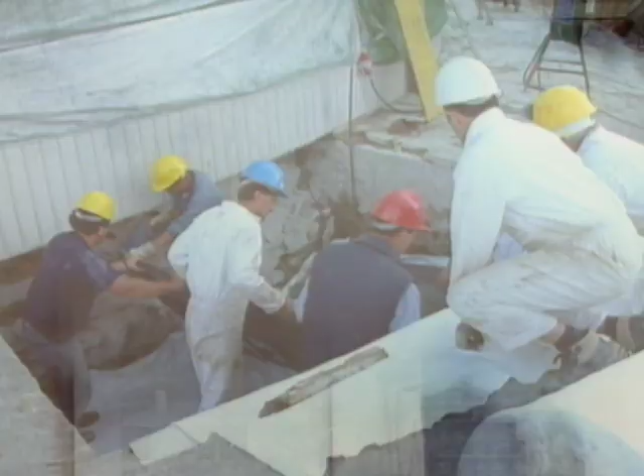In 1995, Pisa's famous tower was falling over at the rate of about 1 millimeter a year. That September, an operation to halt this gradual topple reached a critical phase. One of those in charge of the engineering was Giorgio Macchi.

We have always been very nervous when we did any intervention on this tower, because the tower is reacting in a way which is not always the way we expect.

Operations continued round the clock, and throughout the first 36 hours went smoothly. But the patient remained under close observation.

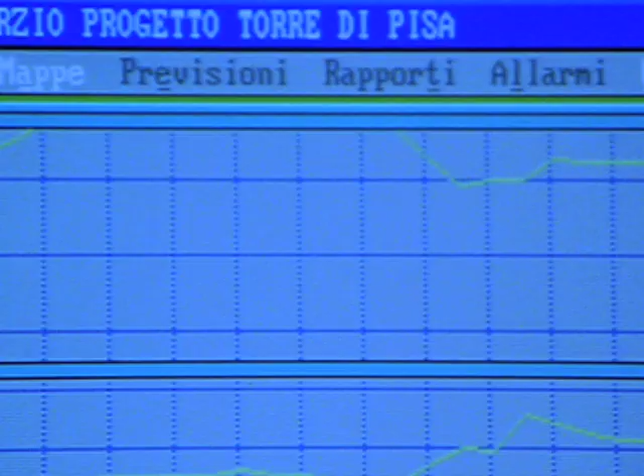At 3:30 a.m. on September the 6th, the tower began to move. The next 9 hours, it fell as far as it had fallen in the previous 12 months.

The engineers were woken in their beds. Panic is not the word to use. Worried, yes. Concerned. And my concern was to get out here as quickly as possible and help in the decision-taking as to how we were going to stop the work, re-stabilize the tower.

The lurch was halted and an immediate collapse prevented. But what became known as Black September taught the engineers how even the best of modern science and technology will struggle to save this medieval enigma.

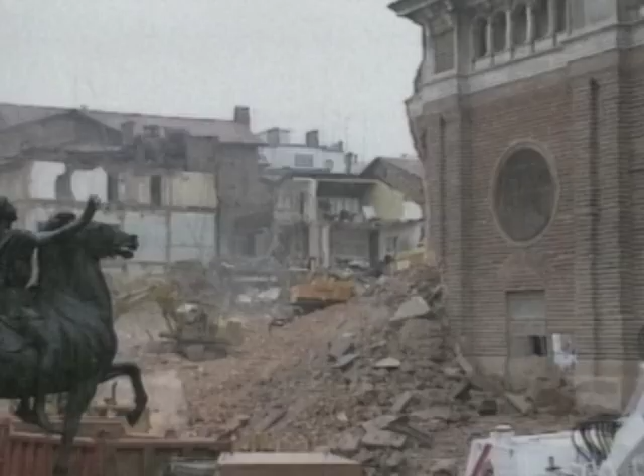Towers do collapse. In 1989, in Pavia, a few hundred miles north of Pisa, a 14th century bell tower collapsed, killing 4 bystanders.

Pavia's tower wasn't even leaning. That's why the quest to rescue Pisa's tower was launched. A committee of brilliant minds has been assembled, and saving Pisa is now among the great prizes in civil engineering.

Among those rising to the challenge is John Burland of Imperial College London. When you come in through the west gate and see this glistening white structure looming over the cathedral, with its lovely symmetry, it is beautiful, but it's breathtaking. The fact that it hasn't fallen over, that it's just shimmering on the edge.

Burland, a soil engineer, digs into problems below the ground.

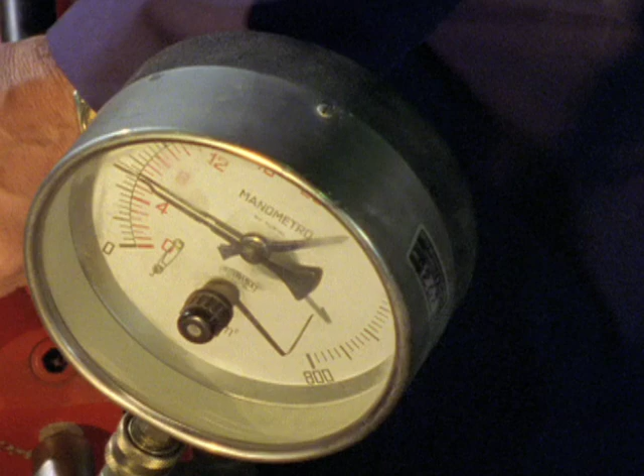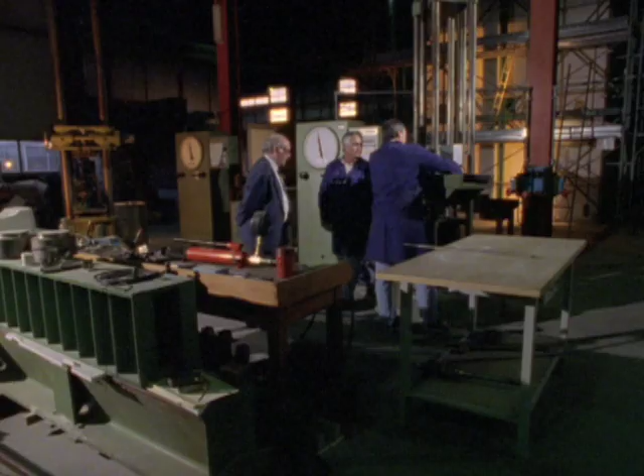But the committee contains equally determined experts who focus elsewhere, like Giorgio Macchi of Pavia University, a structural engineer. Macchi investigates weaknesses in the tower's masonry. My work is on structural problems, so I saw immediately the structural risks. In my opinion, the tower is in real danger.

In 1990, Pisa's dangerous tower is closed to tourists. It's announced the closure may last just 3 months. There's little time for delay, and late 20th century engineering should make short work of this medieval relic.

But the committee is soon bogged down in arguments which continue through many meetings over several years. Conflicting analyses of the tower become the subjects of furious debates, as there is rarely hard evidence that one is any more accurate than another.

The tower turns out to be an engineering puzzle that cannot be unraveled in the way the committee members are familiar with. Meanwhile, the lean continues to grow.

The first to silence debate are the structural engineers. There is a series of massive flaws in the tower which break every rule Giorgio Macchi knows. In spite of our knowledge of structures we have as designers of bridges or other structures, I found here special problems. The shape of the tower is not the usual shape, and every engineering judgment was wrong in this case.

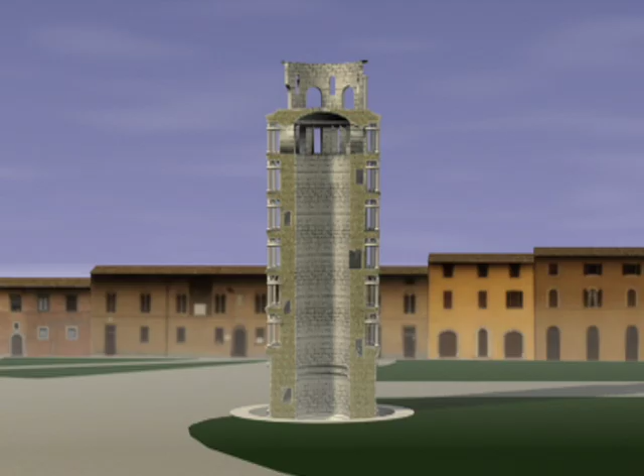The tower is a hollow cylinder, 12 meters wide. In most places, the walls are almost 3 meters thick. But corkscrewing through the walls is a staircase wide enough for 2 Pisans to climb side by side, an extravagant design, which means that in some places, the walls are under 1 meter thick.

This would be just adequate if the walls were solid marble. But this marble facing is only 25 centimeters thick, and behind it there is a conglomerate of stones and lime, which has a very, very low resistance.

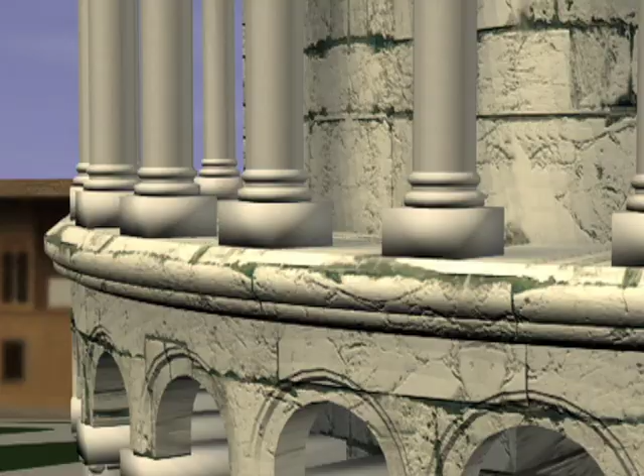The infill of stones and lime is not consistent. There are several large holes in this conglomerate, created by the medieval builder's wooden scaffold. The holes are some 40 centimeters high, so they reduce the resistance area of the wall considerably. The marble is more than a facade.

It provides most of the support for the 14,000-ton tower and bears the stress created by the lean. That's why many of these bricks are breaking up. Although some of these cracks are superficial, one may be the start of total collapse. Macchi must find out if the tower has a flash point.

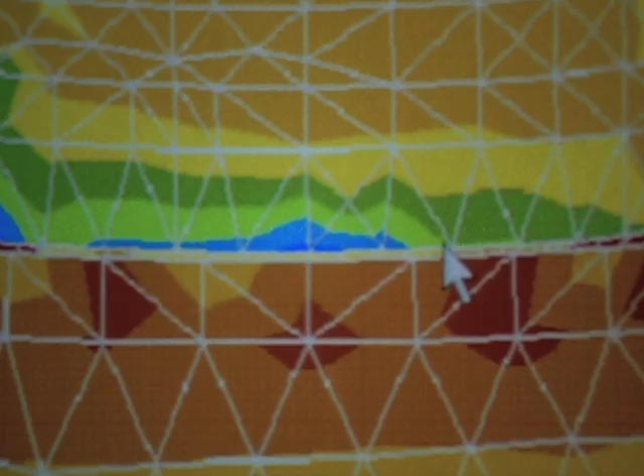Researchers create a computer model which detects the tower's excessive structural stress and then highlights it in red. There is marble under immense pressure right below the lean on the south side of the second story at floor level, where a doorway meets the staircase.

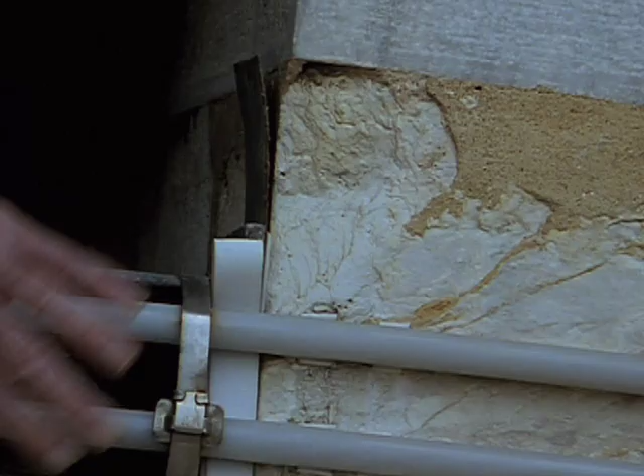The tower is about to burst right here. By calculation, we found that this is the really critical point. And this is shown by the fact that there were very many substitutions of stones in this area. You can see here is the original stone. These are completely substituted stones here and there, and completely substituted in this area.

Because of the tower's immense importance to Pisa, it has always been well maintained. For centuries, whenever a marble block has become damaged, a new one has been chiseled out and fitted into the tower.

So far, this has prevented collapse, but traditional maintenance will no longer contain the extreme stress on the second story. When the marble here gives way, the tower won't just crumble. The tensions accumulated over centuries will be instantaneously unleashed, and the entire structure will be blown to smithereens.

In 1992, in a desperate attempt to contain these forces, plastic-coated metal tendons are wrapped tight around the second story. The cracks are clamped shut, but the lean is still increasing.

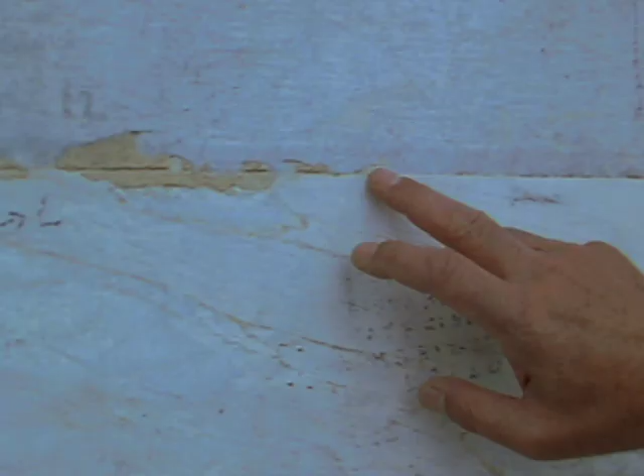With neither plans nor blueprints for the tower, the past must be deduced from the marble masonry itself. Carlo Viggiani is an engineer and committee member. Each stone layer is precise within less than a millimeter. And this is the reason why we can get so much information just by measuring these stones. You can see that in most of the stones there is no mortar at all at the contact between the two stones. It depends on the high quality of workmanship.

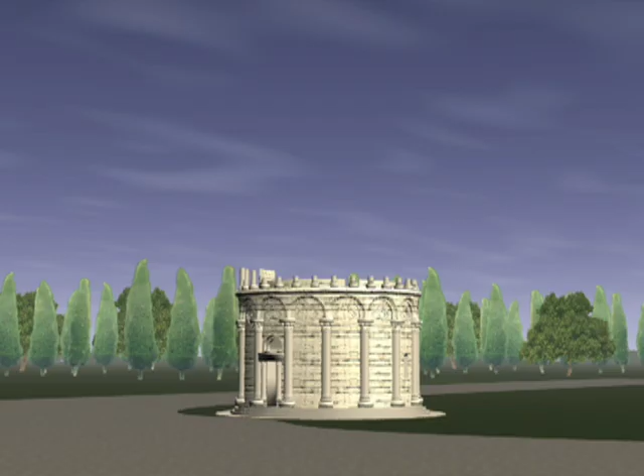From out of the marble emerges the tortured history of the origins of the lean. Constructing the tower was a phenomenal achievement, which will enthuse the engineers, even though it will, at first, bewilder them. Work began in 1173, and after about 6 years, the masons had reached the 4th level. But then they stopped. The tower was abandoned for almost a century. This was probably due to political and economic strife.

But perhaps the delay was a brilliant building strategy. If they'd built the tower in one go, it literally would have fallen over as this one is. You can just see it settling down. It's just collapsed. And that's what would have happened if they'd built it all in one shot. So what they actually did was they built the tower up to a little above the 3rd story, and then they stopped. And the weight of that tower in that state squeezed the underlying ground. And over the years, the ground became stronger. So when they came back 100 years later, it could take the full weight of the tower.

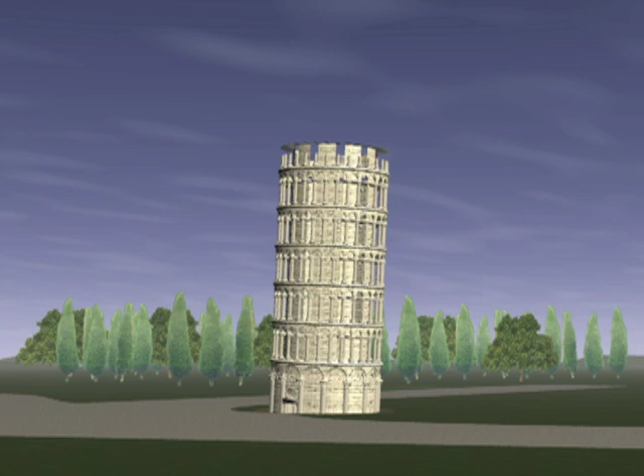When construction did resume, the masons must have noticed a slight lean to the north. So as they built upwards, they straightened the tower. What they did is to have slightly higher stones on the side where the tower was leaning. But as it was straightened, the tower lurched in the opposite direction, south. And when the masons reached the 7th story, work stopped again. Over the next 90 years, the southward lean grew to 1.5 degrees. A severe inclination that did not deter the masons from adding a bell chamber.

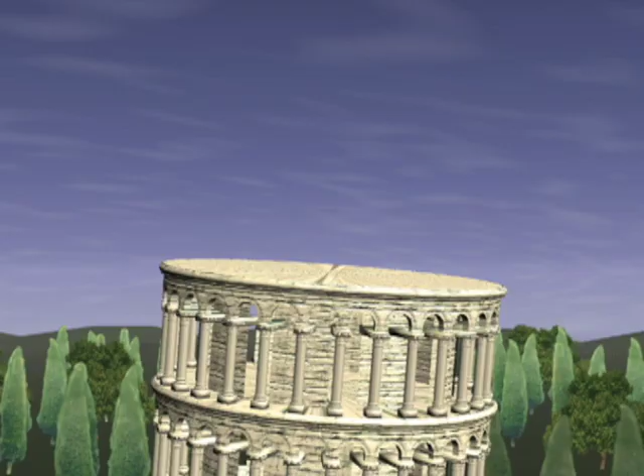When they started again to construct the bell tower, they had to make a substantial correction. And they did it by changing the number of steps according to the direction. On this side, we are on the north side, we have only 4 steps. We will see that on the opposite side, we have 6 steps. Now we are on the south side, where the steps are 6, just to correct for the inclination. I feel this tower personally as a challenge. I cannot conceive the men constructing it knowing that it was progressively leaning and going on and finishing it.

Viggiani may be impressed, but thanks to the delays and corrections over generations of masons, the tower is shaped like a question mark. You had different people working on it at different times with different states of knowledge about what structures like this can do, what they can't do, what happens to them over time. And you've got different sections of the tower that are different geometries. So to right it to any degree, you may not get the predicted structural action that you would want.

By the early 90s, years of scientific research have produced a painful conclusion. The more the Leaning Tower is studied, the more questions it poses. But enthused by the determination of the medieval masons, the engineers do not give up. They are on the verge of startling discoveries.

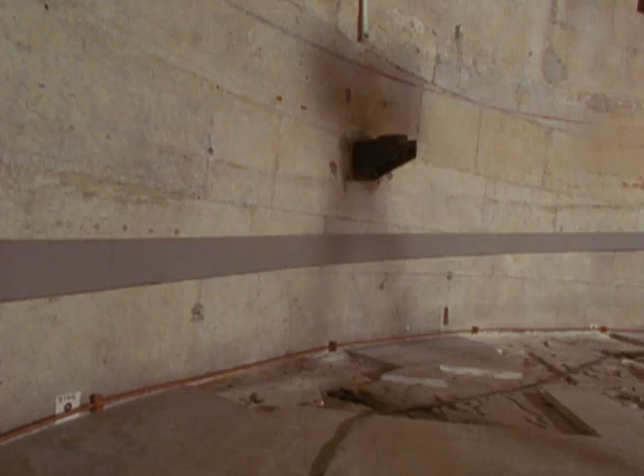The Leaning Tower of Pisa is the most intensely observed building in the world. A surveyor takes readings twice a day. A circular sensor, which can register the vibration from a footstep, runs around the inner walls. Brackets gauge shifts in each of the tower's 25 largest cracks. 3 plumb lines hang from the top level. Taut cross wires measure deformations in the walls.

Skeptics claim that all the monitors will do is record the collapse in absurd detail, but discoveries have been made. The tower reacts to changes in the elements. Every day, the entire building sways in a minute circle less than 0.2 of a millimeter across. This infrared camera shows why. The lens is sensitive to heat, which is displayed as white. As the sun heats the south side more than the north, the marble here expands, creating an imbalance and motivating the lean. At night, it will cool down and shrink back.

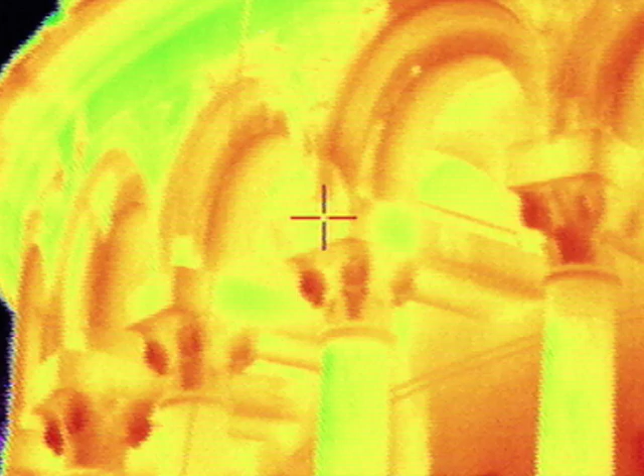Larger movements are recorded during rainstorms. We get these extraordinarily heavy storms in Pisa, and the water table rises very quickly indeed. And it rises on one side more than on the other, and it lifts that side. It happens to be the north side. It lifts the north side a bit, so the tower goes to the south when the water table comes up.

Carlo Viggiani has studied the tower for 35 years and is unperturbed by this idiosyncratic behavior. Probably in this moment the tower feels very sad and increases its leaning. But when the sun will come back, I say she, probably I say it will come back again.

Sensitivity to the elements suggests the tower was founded in very fluid soil. Between Pisa and the nearby coast is an alluvial marsh. The engineers suspect this is what the ground around the tower looked like before construction began. On the marsh's exposed shoreline, John Burland wonders what effect this ground might have had upon the tower.

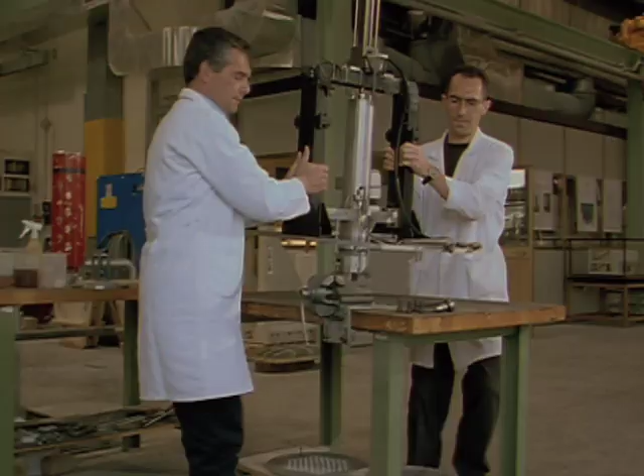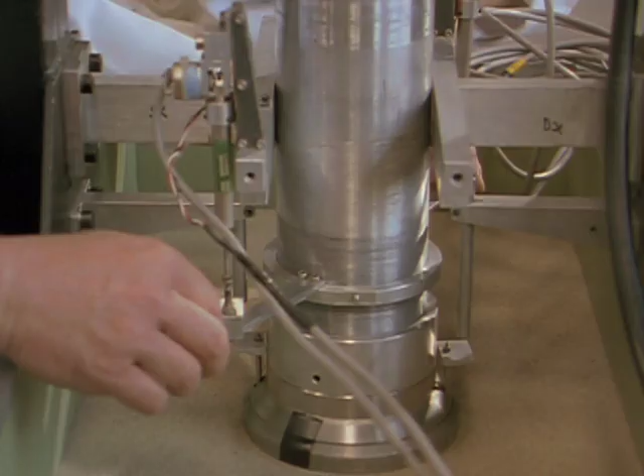In Bergamo, in the far north of Italy, a team of scientists performs an ingenious experiment in which they attempt to reconstruct Pisa's geological history. An aluminium model of the tower, less than a meter high, is placed upright on sand which has been carefully arranged to mimic the silt below Pisa's tower. Sandy silt and metal tower are then lowered into a centrifuge which will create immense pressures to simulate the effect of hundreds of years of gravity.

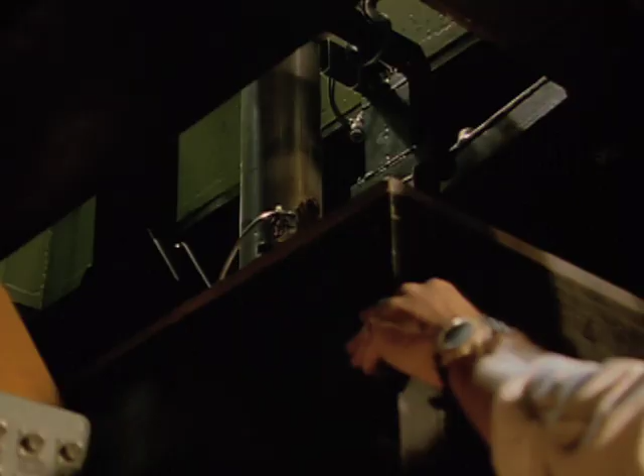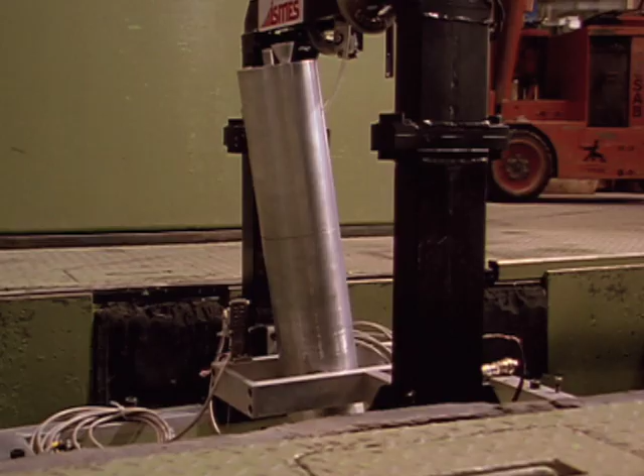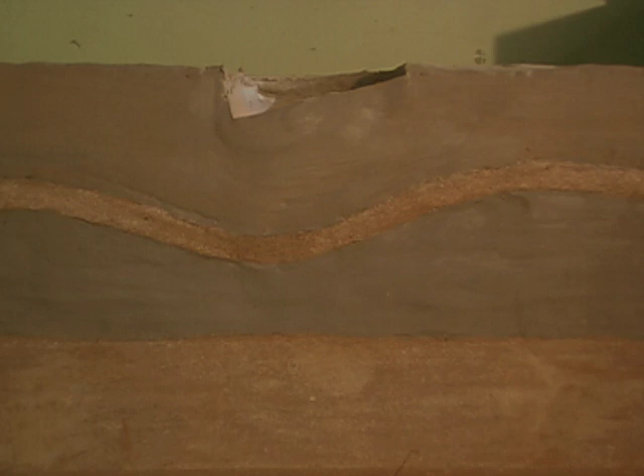Centuries are compressed into weeks. As the model is taken out of the centrifuge, it leans just like the real thing. When disassembled, the experiment reveals how the tower sank lopsidedly through soil as soft and inconsistent as a beach. The engineers have at last explained why the lean began. Now they must develop a technique to reverse the lean and so save the tower.

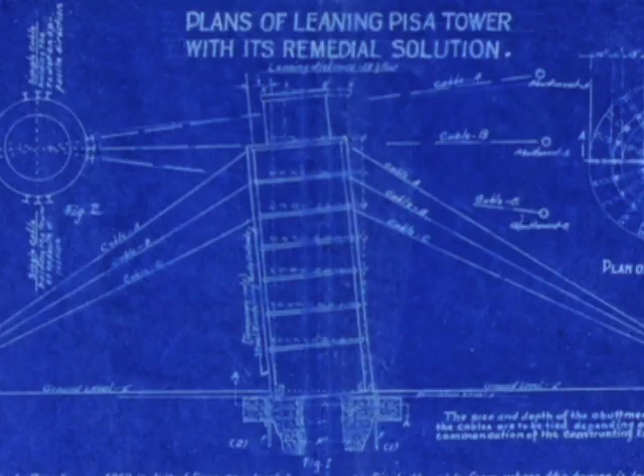The tower has always been cared for by a board of works called the Opera, whose presidents represent an unbroken line of craftsmen going back to the 11th century. In the Opera archives are thousands of schemes for the Leaning Tower, sent in from all over the world. Some were devised by qualified engineers, others by school children. Most schemes involve propping, but a huge prop would be unacceptable in the historic Italian piazza and would probably destroy the tower anyway.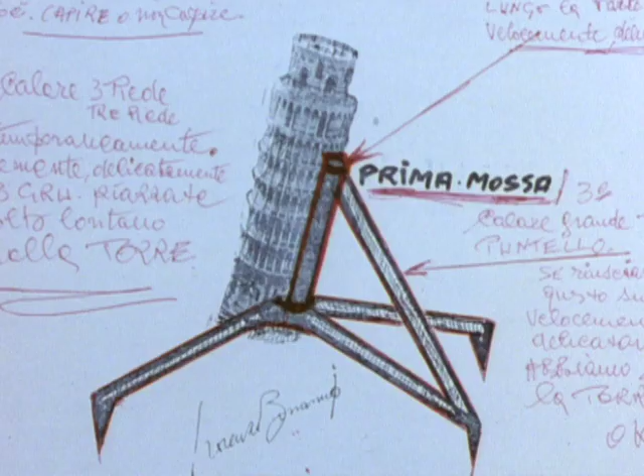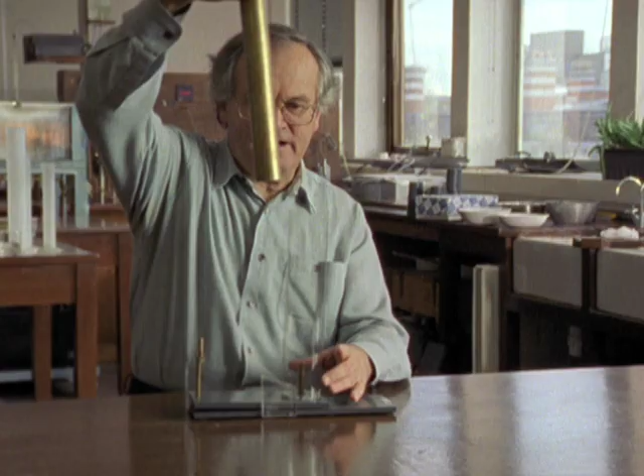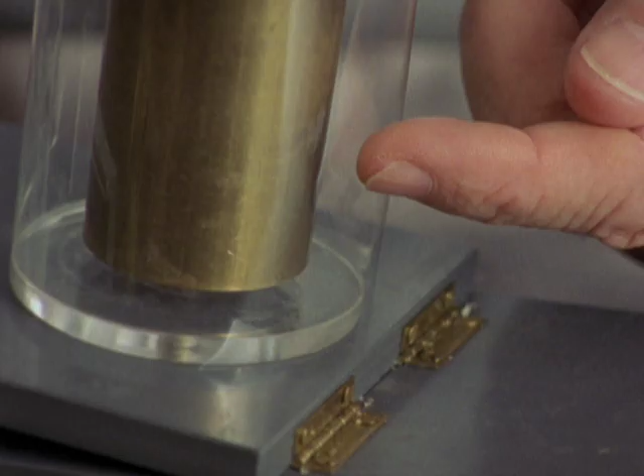A lot of people say, why can't we just prop it, or why can't we just push it back? And this experiment shows why that's about the most dangerous thing you could do, in fact. The masonry is represented by this acrylic cylinder, and this weight here applies weight to the top of the tower. We'll increase the inclination of the tower and prop it or push it, and you can see what happens. It just literally collapses.

By the early 90s, the committee still haven't agreed a plan for a permanent reversal of the lean, so they decide to compromise, to be less ambitious. We felt that the tower was very close to falling over, and we needed to do something urgently to temporarily stabilize it. The engineers looked through previous studies of the tower. The first precise measurements were made in 1817 by two British architects, Edward Cresy and George Taylor. The lean was just over 5 degrees, but this was a static observation.

Regular surveys have been made since 1911, and from study of this data, a breakthrough is achieved. The tower has stopped settling into the silt. The ground has hardened, and the tower is no longer sinking. It's tilting over, capsizing.

And as soon as we discovered that, we thought, if this side is coming up, then it's rather like sitting on a sailing boat. If you can just lean out, you can pull it back a little bit. Surely it would be safe to put temporarily some load here to reduce the tendency for the tower to fall over.

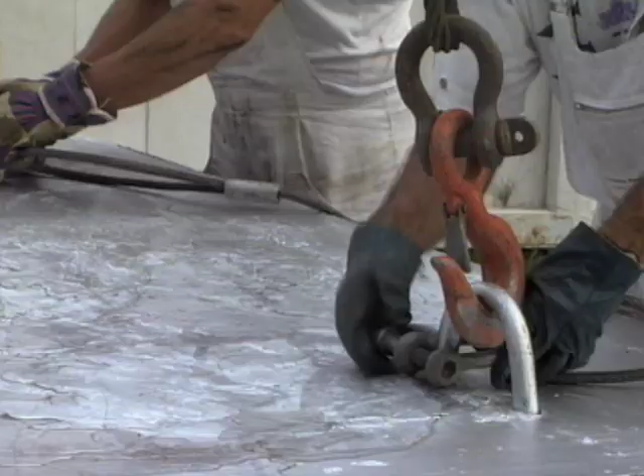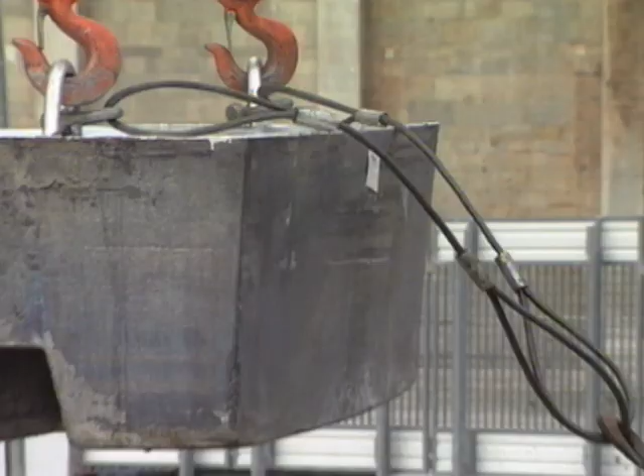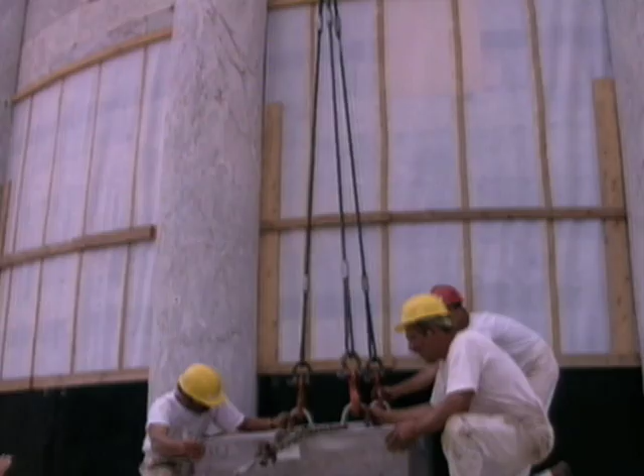In July 1993, the contractors start piling 600 tons of lead ingots on the rising north side. There is always the risk that the ground might give way again and the tower start to sink, then crash. We did this very gradually over a 4 or 5 month period, putting the lead weight on, leaving it for a day, making measurements, putting another one on, and so on.

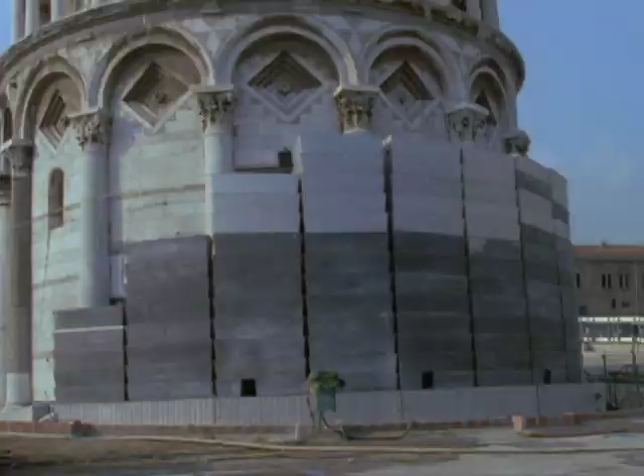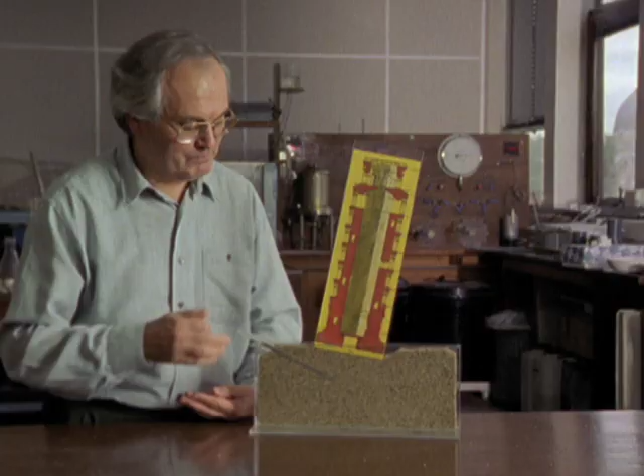As an emergency stabilization, the lead ingots work. For the first time in 800 years, the lean is under control, but the beautiful tower has become an eyesore. Burland concentrates on an alternative solution, which might provide long-term security for the tower. This model demonstrates the soil extraction technique.

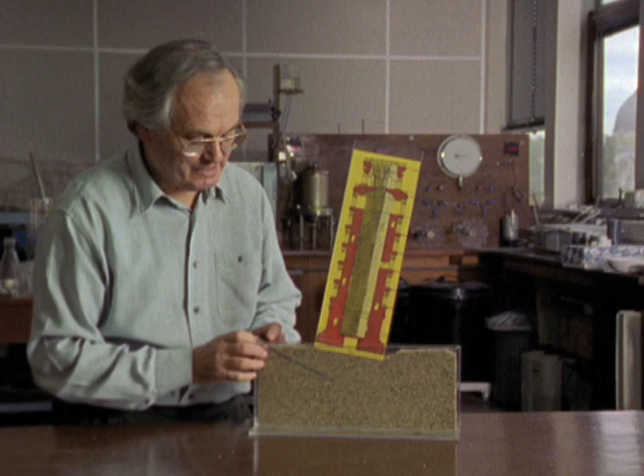We drill in under the tower with a specially designed drill which causes no disturbance to the ground. And when it's at the location we want it, we can then gently pull the drill out. So if we look at this, the soil will then close in the cavity, and we'll see the tower rotating back towards the north side as we under-excavate. A 10% reduction in inclination will reduce the stresses by 10% in the masonry, and that's a very reasonable amount.

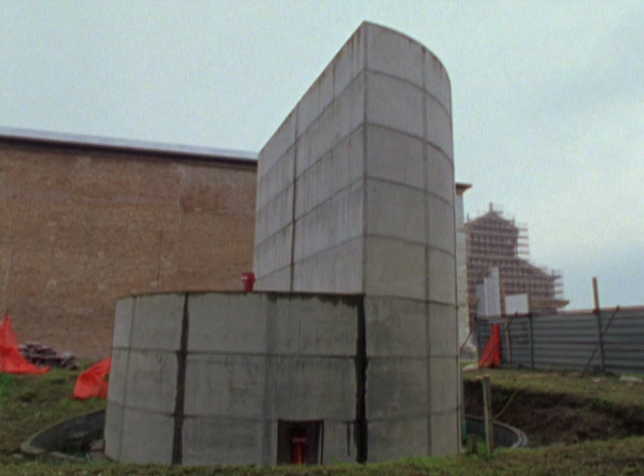In Pisa, a concrete test tower is constructed. It's taller and heavier on the south side, and so applies the same force on the ground as the real Leaning Tower. Here, a full-scale experiment is conducted. And we were extracting soil over a length of this sort, and you can see here how the ground has subsided, and that brought the whole trial footing northwards by about half a degree.

But some committee members have doubts about soil extraction. Such intervention has been tested on a specimen, and this works very well. But to extend this intervention under the tower in this special situation which has been formed in 700 years, there is still a residual risk, and the committee is thinking about that.

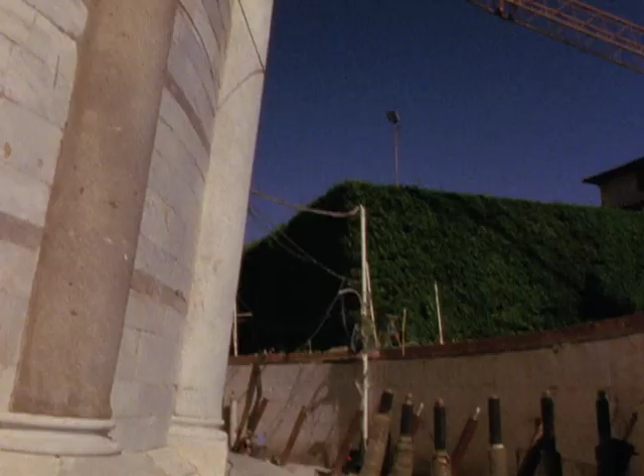There have been 16 committees set up to save the Leaning Tower of Pisa, and there have been many previous interventions. All have failed. The most disastrous and instructive meddling was the digging of this trench around the base of the tower. This is called the Catino. It's a walkway, and it was excavated by an architect called Gherardesca in 1838.

Now it's important to remember that the tower has settled about 3 meters since it was built. As a result of the settlement, the base of the columns on the ground floor had become buried beneath the ground.

And Gherardesca argued that it would be lovely to reveal them so that people walking around the piazza could view the base of the columns as the original architect had intended them to be. So he just came in and dug this out, and he dug down about 1.5 to 2 meters down, and this is the wall of the Catino.

What he didn't realise was that the water table is about here. So there's a lot of water behind this wall and under the foundations, and as he dug this Catino out, the water came spouting out of the ground, and the tower moved. The top of the tower moved about 0.5 metre. It lurched, literally, this way. It's amazing that it didn't fall over.

At least this dreadful history tells the present committee what not to do. When anybody has tried to do anything on the south side, the tower has always said, "Don't touch me. I'm very, very delicate." And it's moved. So the tower has actually spoken to us through the way that it's moved. So caution is wise, but visitors to the tower grow impatient. By the mid-90s, Pisa's vital tourist industry appears to be struggling.

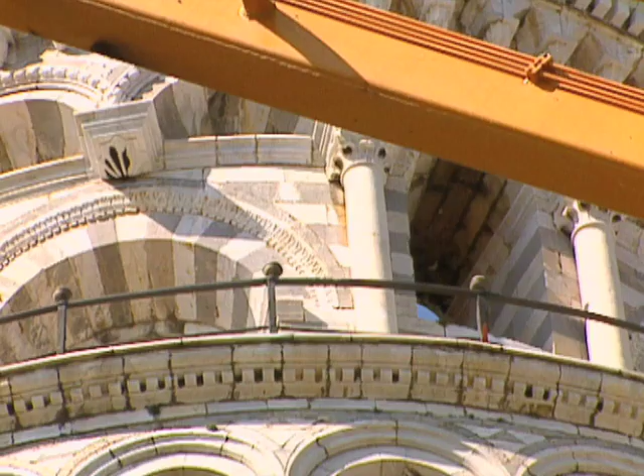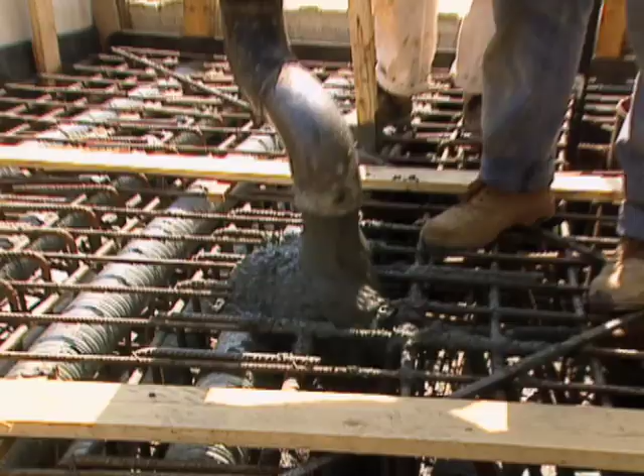In this plan, anchors will be attached to a concrete ring wrapped around the base of the tower. These will then be drilled through the soft soil and secured in the solid bedrock 40 meters down. The pull from the anchors will replace the push of the unattractive lead weights. In 1995, contractors attempt to install the ring through which the anchors will be connected to the tower. The reinforced concrete ring is constructed under the Catino, beneath the water table.

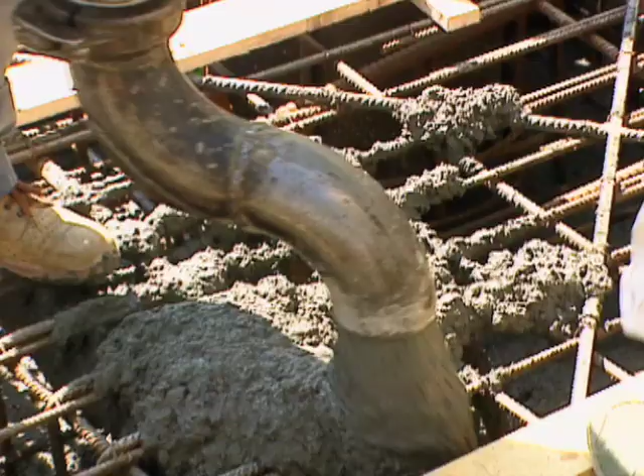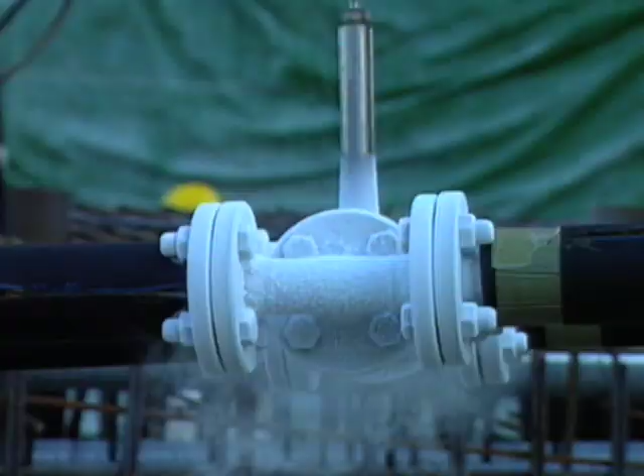So, as the contractors burrow down, liquid nitrogen, which has a temperature of almost 200 degrees below zero, is injected into the soil. Any groundwater is frozen solid, so cannot flow into the diggings. This precaution triggers the events locals will come to know as Black September. Throughout this difficult period, safeguarding the Piazza dei Miracoli remains the responsibility of the opera president, Ranieri Favilli.

There was a time in which, to tell the truth, I began to imagine I was hearing strange noises during the night. I can't say I didn't worry about this. Unfortunately, it's inevitable, because first of all, I'm a Pisan, and secondly, I would frankly be very unhappy to go down in history as the opera president under whom the tower fell.

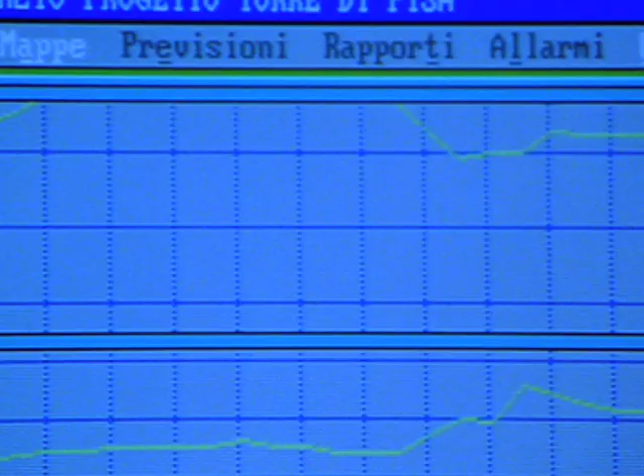It's shortly after freezing moves to the sensitive south side that, on the 6th of September, the top of the tower lurches 1.5 millimeters south. In one night it moved what it normally moved in a year, and that worried us, because if that had continued, that would have been very large and the tower's stability may have been in jeopardy.

Burland flies out to Pisa, where he's joined by Giorgio Macchi, one of the scheme's main advocates. Perhaps because there's no fractious committee to dispute it, a restabilization is begun almost immediately. The lurch is halted by piling on 300 tons more lead. The attempt to remove this eyesore has only made it worse. But later, Macchi makes light of Black September.

There was so small an inclination southward that it would be nearly impossible to measure with the old means. But we knew that the tower was moving, was responding in a special way, and we decided to stop the work.

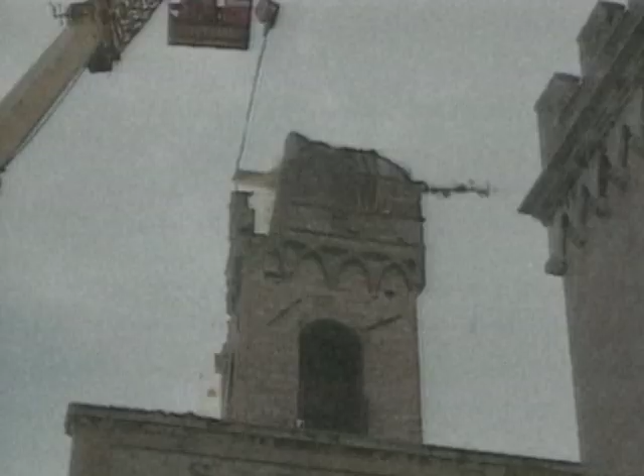The committee remains out of action until, in autumn 1997, south of Pisa, near Assisi, birthplace of St. Francis, an earthquake measuring almost 6 on the Richter scale hits. Thousands are left homeless. Unique historic buildings are damaged beyond repair.

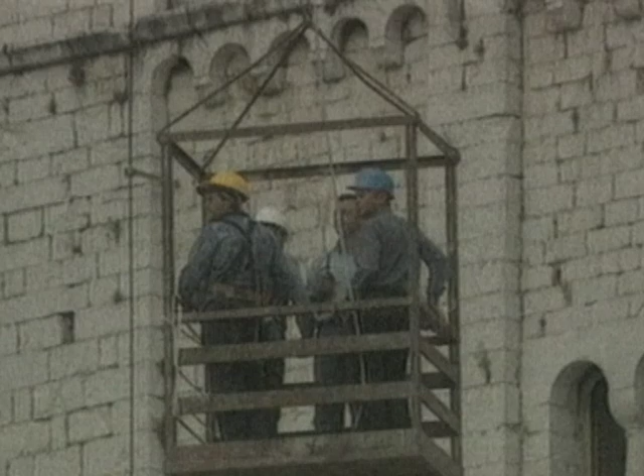It soon emerges that although this earthquake was no surprise, little was done to prepare for it. The resulting scandal inspires a new dynamic attitude in Italian restoration and conservation. In Pisa, the committee is reconvened, has a change of heart, and, in late 1998, finally approves soil extraction.

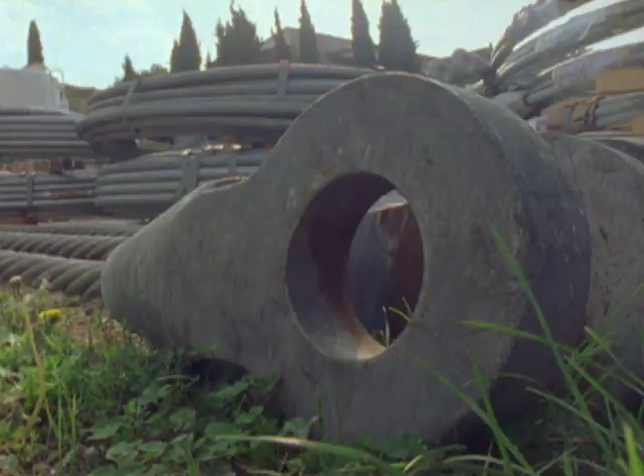Now we're faced with the reality of doing something on the tower for the first time, something very delicate, and something that we hope will provide the final solution. But there is no margin for error left now. So before the final solution begins, the engineers will weave a network of steel cables into a harness for the tower. The harness is a temporary safeguard structure.

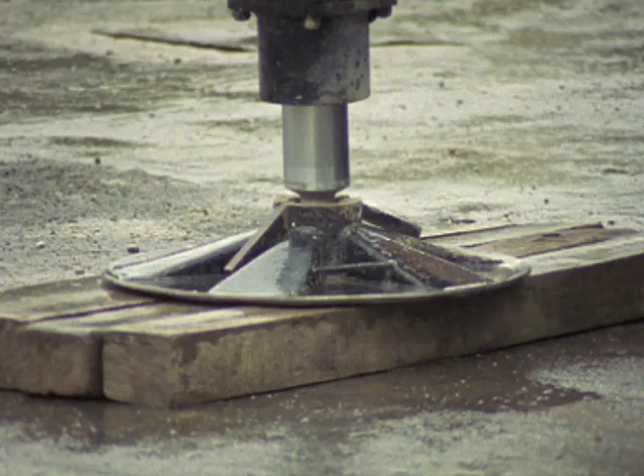It's there to make quite certain that if something goes wrong, we can control it. It's only temporary. It'll only be there when we're operating on the tower. During an unsettling deluge, the first cable of the harness is craned into position.

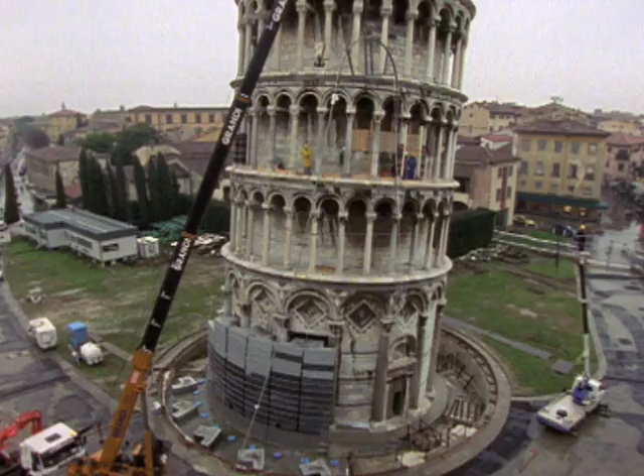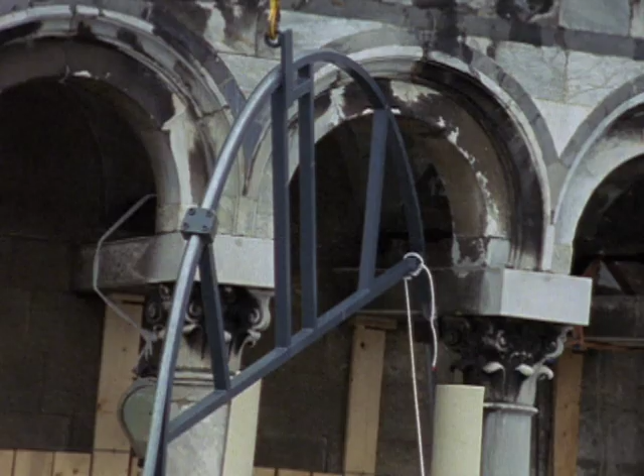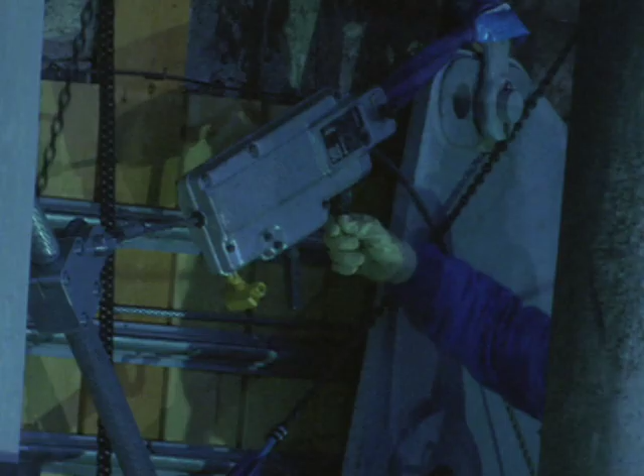Although only temporary, this is a huge project. Just 10 yards of this cable weighs half a ton. If it lashes out from the crane, it could kill the workmen and damage the fragile tower. The cable slips and jams into a marble arch. Hours later, the struggle to free the cable is successful. That night, the first component of the harness is secured.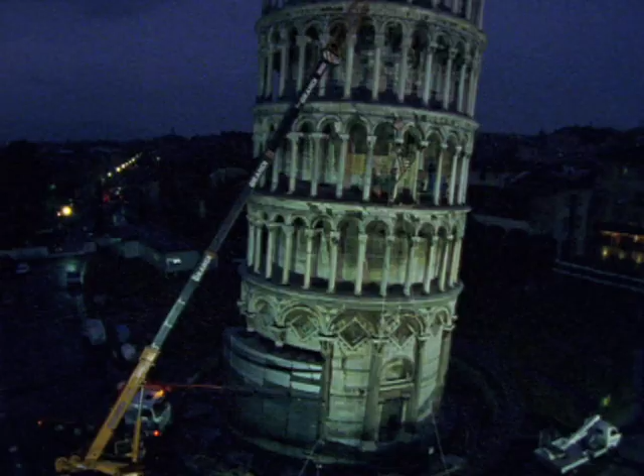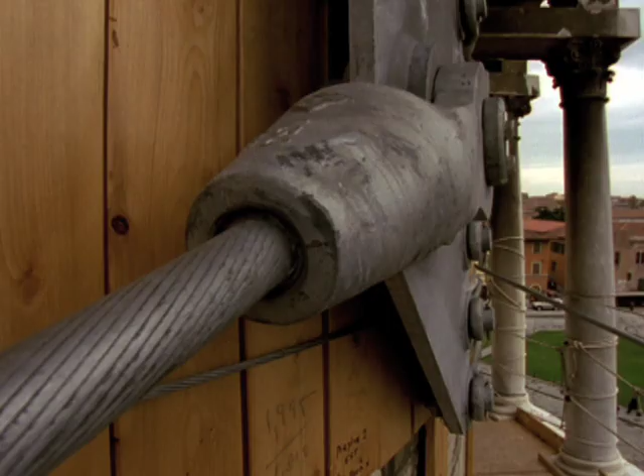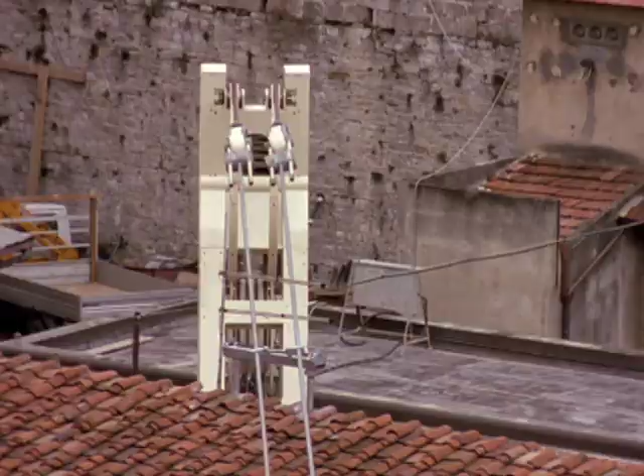The completed harness appears to be an attempt to prop up the tower, but propping had previously been dismissed. In fact, these hefty cables anchored to massive tripods are finely balanced and apply very little force to the fragile masonry.

The harness is not intended to stop a catastrophic failure. It's not for that at all. It's simply to hold the tower gently if the movements of the tower are unexpected. By February 1999, the scene is set for a major intervention.

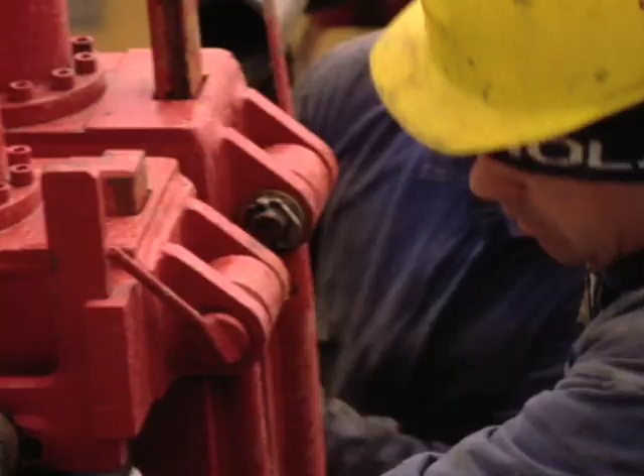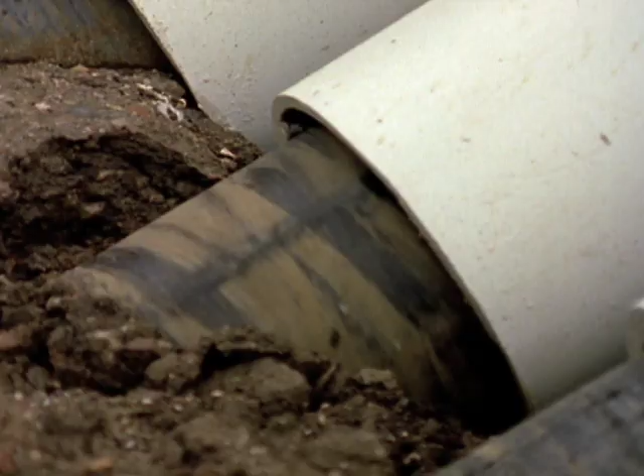We have just started soil extraction. The drill is about 5 meters below ground level. And then the soil extraction takes place beneath the floor of the catino. And the effect extends out. As we take the soil out, the effect of it extends under the tower.

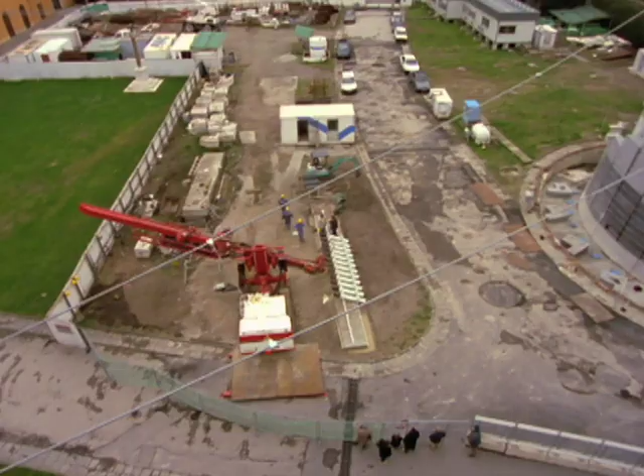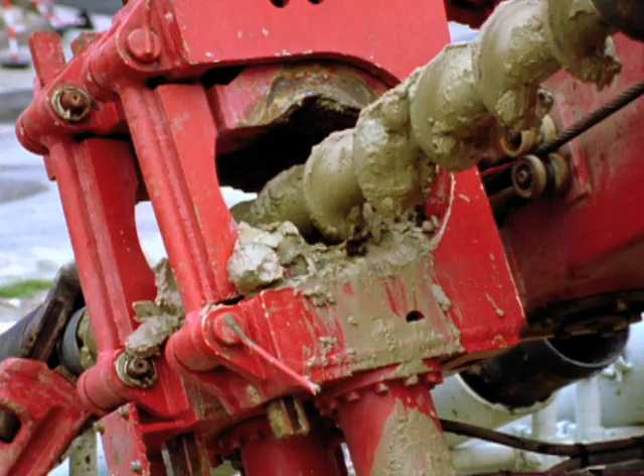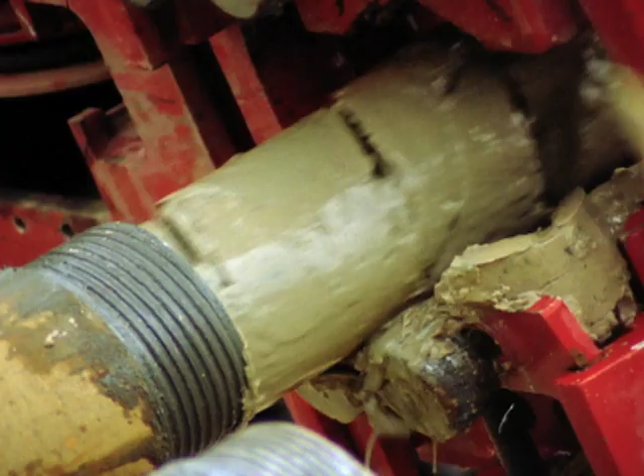The success of soil extraction hinges on the assumption that the ground below the tower is almost pure silt. On day one, 27 litres of soil spews out of the extractor casing, but it looks like clay, not silt. Burland is quick to make an on-the-spot analysis. An experienced soils engineer can tell exactly what the soil material is.

If you just put a grain or two against your teeth, you can tell straight away that this is actually a sandy silt. It feels like clay, but it's actually a sandy silt. So it's total confirmation of what we were expecting.

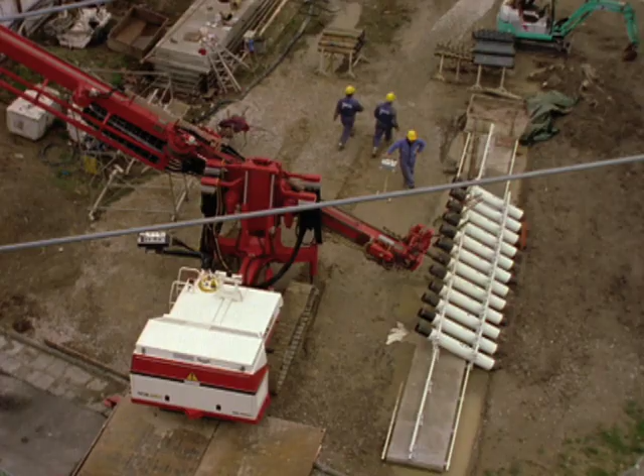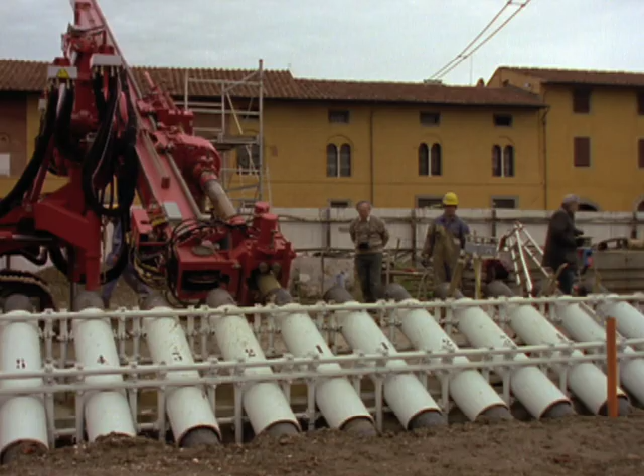The tower has been creeping south for centuries, and so the lean will not be reversed in a few hours. Right now, the main fear is that the drilling will trigger a catastrophic movement further south. The monitors reveal no negative response from the tower. We have started what could well turn out to be the final stabilization measures.

The result will be that the tower will be leaning at 10% less than it is now, and we will have added 300 years to its life at least, and we will have reduced the stresses in the masonry. And these have been our prime objectives right from the start of the whole project.

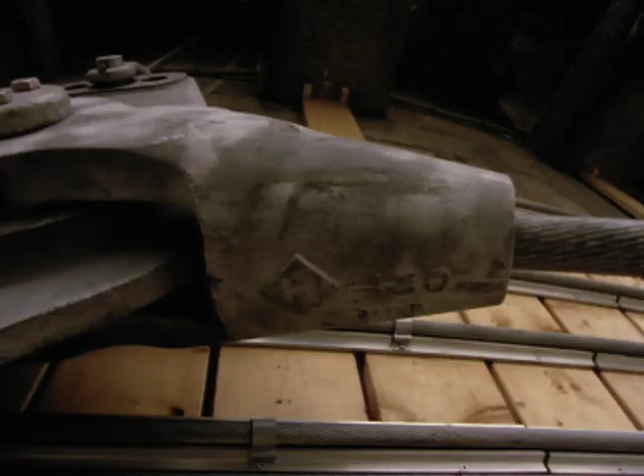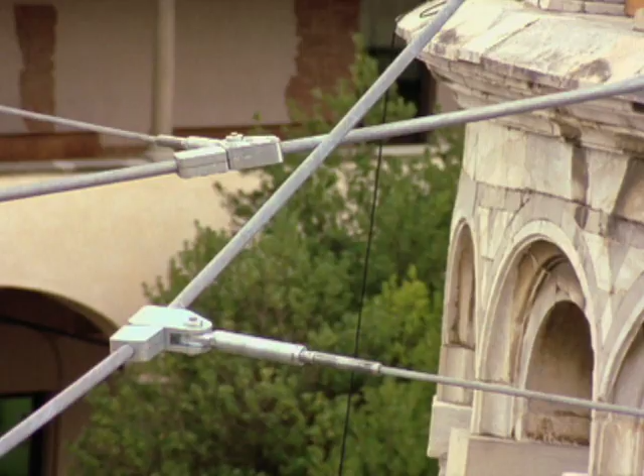After 2 months of soil extraction, the top of the tower has moved 6 millimeters north. Finally, the medieval enigma appears to be under the control of science and engineering. But the stable position of 300 years ago lies almost half a meter further north.

Even if the operation goes well, it will take about 2 years to move the tower back this far. Until then, the Leaning Tower of Pisa will remain wired in and strapped up like a hospital patient on the operating table.